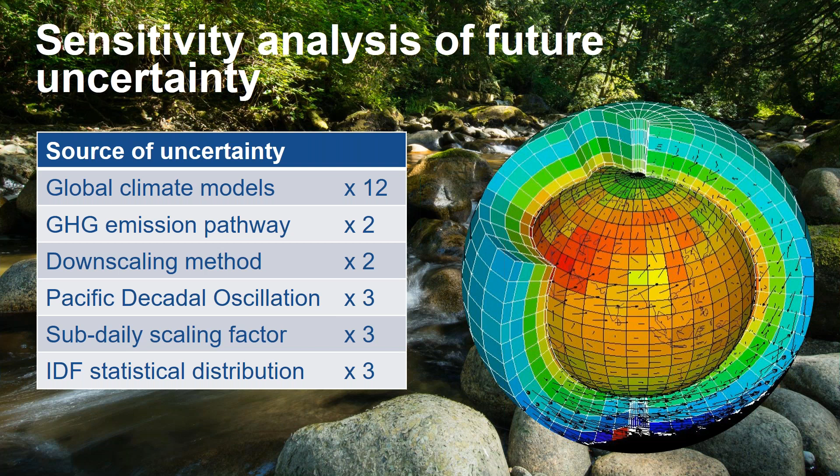The methodology considered all various sources of uncertainty in future climate change projections to develop a moderate and a high future scenario. The net result was over 100,000 possible combinations of uncertainty scenarios: different global climate models, emission pathways, downscaling methods, sub-daily scaling factors. All of those netted out to over 100,000 possible combinations.

Out of all of those, we selected two sets of results: a moderate scenario that represents a middle of the road or a likely scenario for rainfall, and a high scenario that can be considered a more conservative or worst case.

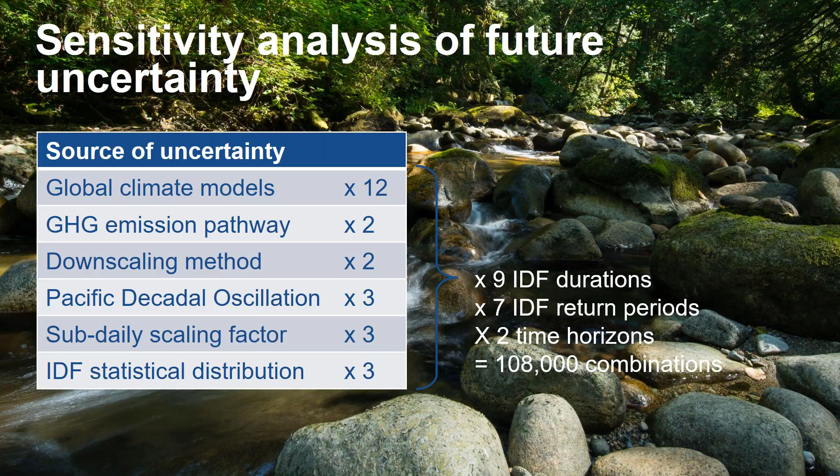An early deliverable was the new rainfall zones for our region. If any one of you is familiar with our area, it's generally known that rainfall increases from southwest to northeast. We used to consider rainfall zones using annual rainfall as the common denominator, which saw a fairly smooth southwest to northeast pattern of increasing annual rainfall.

Our new zones, which we call homogeneous rainfall zones, zones of like rainfall: volumes aren't necessarily the same in each zone, but the patterns are. And as you can see, the new zones are a bit more, shall we say, blob-like than smooth contours. So, for example, Zone 1 covers the west half of Metro Vancouver, and Zone 4 is most of Burnaby, and there aren't any smooth lines of delineation like there were with the annual rainfall zones.

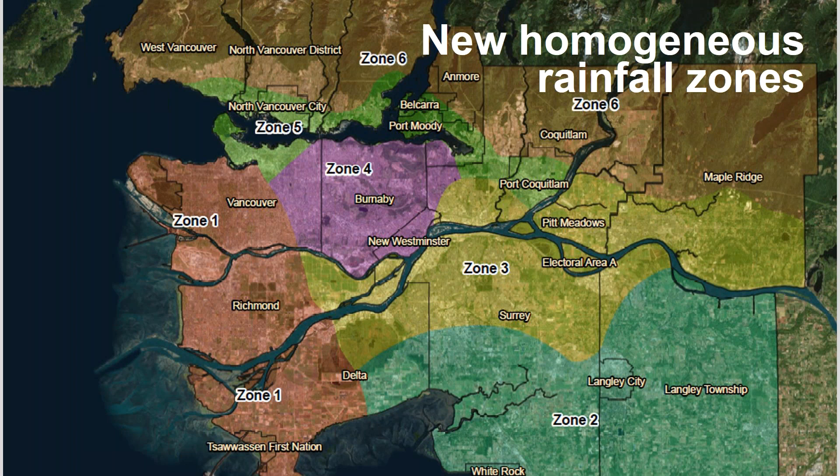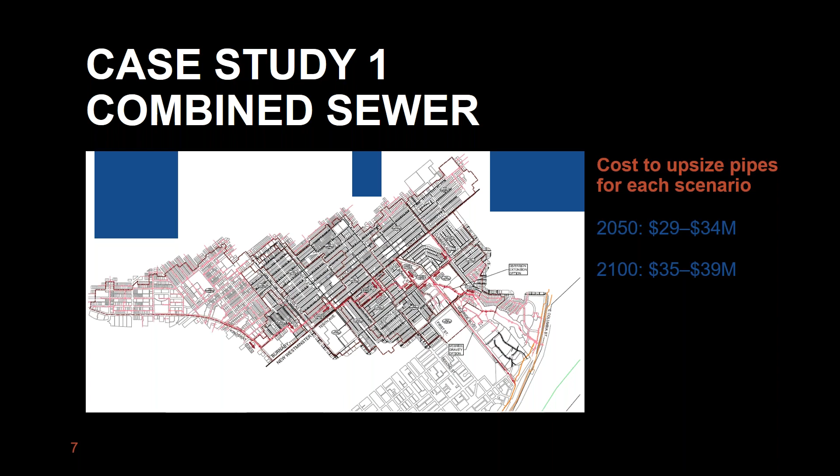The flooding could be mitigated by upsizing pipes, and the costs right now show the range of the moderate and high scenarios. The incremental costs of choosing the more conservative scenario are around 10 to 15% higher than preparing for the moderate scenario. So the spread and uncertainty isn't as great as some feared.

Case study 2. The second case study looked at the Port Moody Coquitlam drainage area, also known as the Chine. This is an escarpment with storm sewers and creeks. Similar to the first study, the climate change results in flooding, and pipes can be upsized to address capacity issues. Again, the difference in cost between the moderate and high scenarios is 10 to 20%. The bigger question here for us is, how do we plan for and fund climate change adaptation, not whether we can predict the exact scenario.

We know that flooding can be reduced by adding source controls or green infrastructure like bioswales, pervious pavement, rain gardens, or detention ponds. And we assumed that these green infrastructure measures would be implemented as each property redevelops. Green infrastructure does help reduce the impact of climate change on peak flow, and we should pursue it as much as we can, but it may not be enough to counteract the increase in precipitation due to climate change, or all of the increase. We can't expect to keep the same level of service by relying solely on green infrastructure in the face of climate change, or solely on gray. There's

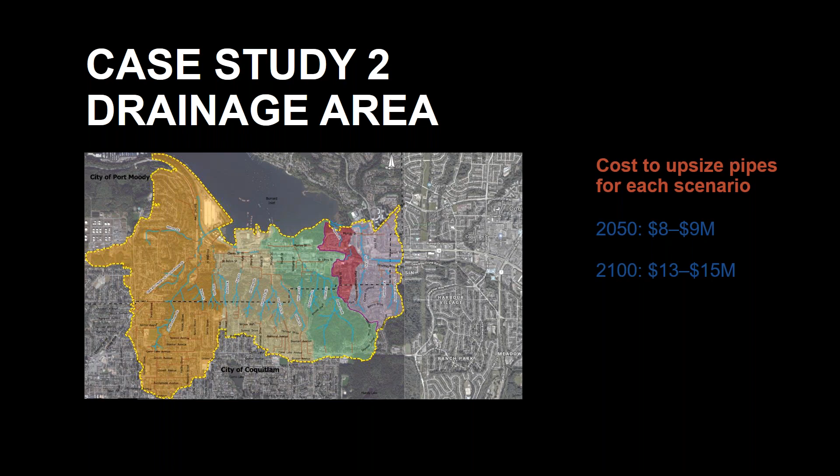sharing of the load. The third case study on our sanitary system, sanitary sewer I&I, was the Collingwood Sanitary Trunk Sewer in Burnaby, which runs west from Metrotown into Vancouver. The focus was the change in inflow and infiltration, which, if you're not a sewer engineer, is basically leaky sewers, with future rainfall increases. Inflow and infiltration enters the sanitary sewer through rainwater and groundwater, which it shouldn't.

In addition to climate change, population growth will impact the sanitary sewer capacity. The population in the sewer catchment is projected to more than double by 2100. Population growth alone will challenge the sewer capacity, even with today's rainfall. If the pipes were upsized just for population growth, but not climate change, capacity would be mostly fine into the 2050s.

Sanitary systems are designed with some excess capacity for I&I, which in this case can accommodate the precipitation in the 2050s, but by 2100, climate change-induced increases in I&I will challenge the pipe capacity, and more pipe upsizing will be needed at a cost of $1 to $2 million to account for future climate.

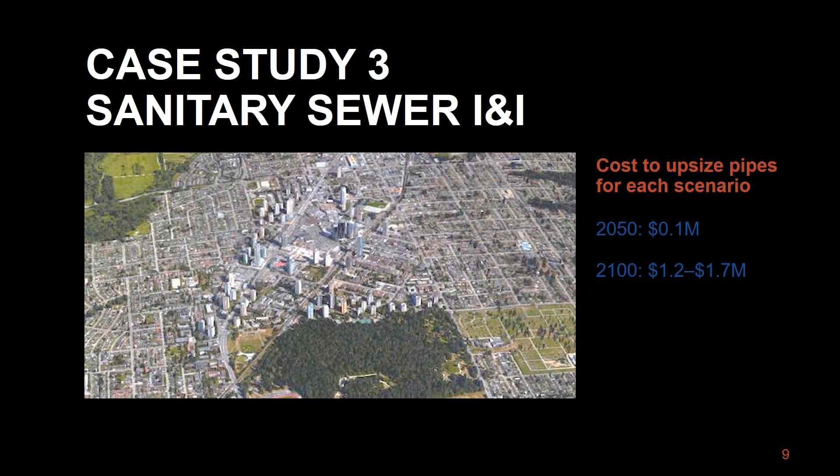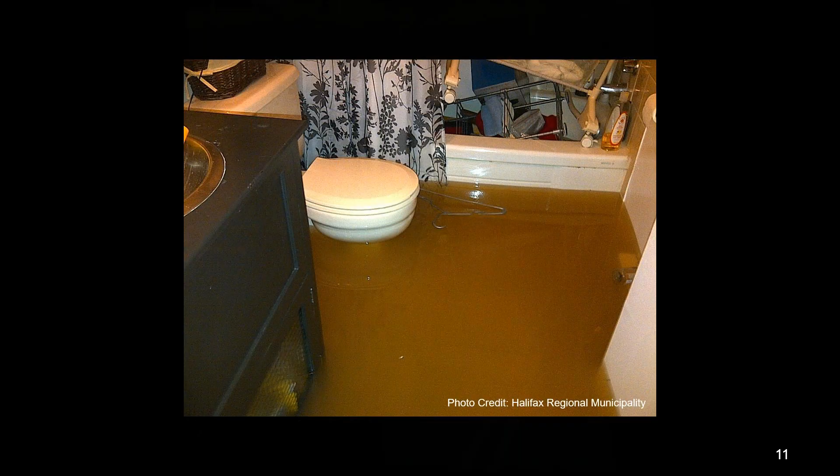So those are our case studies, and just more generally, our projections on climate may result in more street flooding, basement backups potentially, and the thing is that we are continuing to develop our region with more paving, more roads, more vehicles, and more population. And so, to me, what we're in is an environment of decision-making under deep uncertainty.

And this field of study, whose acronym is DMDU, is what we're doing. We're making decisions under a lot of uncertainty. And a challenge for the infrastructure business is the long lifespan and high costs of the things that we do to redo, fix, or upgrade.

Sewer infrastructure, for example, can last for over 100 years, and it can cost time and money to redo or dig up again. And engineers have provided the expectation that civil underground infrastructure went in once 100 years ago and then gets replaced 100 years later. This, of course, assumes that loads wouldn't really change over 100 years, which, of course, we know is not the case. So now that we know what future rainfall could be, we have an idea of what challenges to the system could happen. And we know there may be more flooding, more soggy ground.

So I ask, how do we make decisions that will reduce the risk later, sometimes a lot later, and what do we do now? So we can tell you how hard it might rain in the future using these projections, and we could even tell you how big the pipes need to be or how big the rain garden needs to be. But what is the right solution? How robust is that solution? And what happens if we're wrong, and how do the costs get played into this equation?

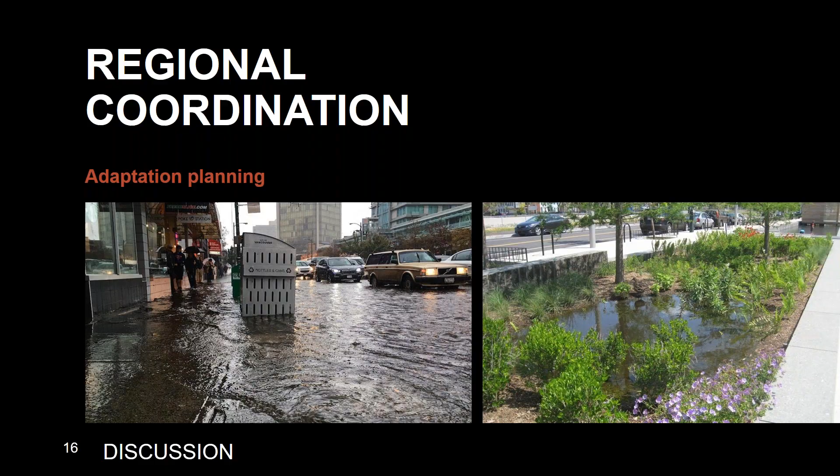So I'll end here with my daughter, who is currently 2.5, and who, as you heard in the intro, I chase around the park all the time. And the thing is that she will be 83 in 2100. So she'll be alive, she'll be thriving, my family will be around. So I asked, what decisions will we have made that will make her future great, and how can we collaborate and make decisions that will make this world thriving, livable, and safe?

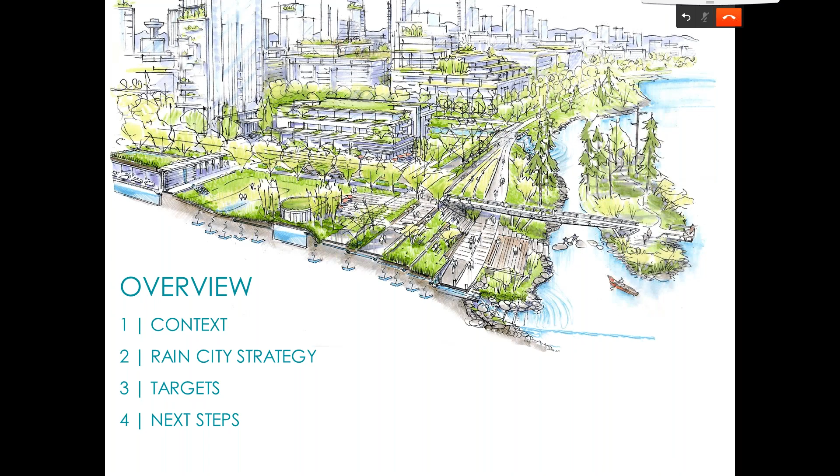So I'm going to talk a little bit about the work that Vancouver's been pursuing through something called the Rain City Strategy, which is our effort to really reimagine the future of how we manage rainwater in the city in a more holistic and integrated way. So I'll just provide a little bit of context, and the Rain City Strategy actually was recently unanimously approved by our council on November the 5th, so we're really excited about that. So I'll provide an overview of what the directions are in the Rain City Strategy. I'll speak a little bit to some of our targets and our next steps.

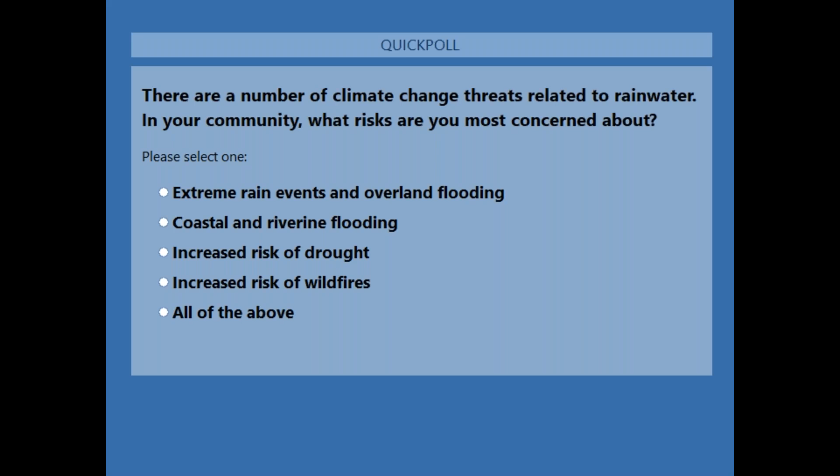All right, so the results were 19% extreme rain events and overland flooding, 7% coastal and riverine flooding, 7% increased risk of drought, 7% increased risk of wildfires, and 61% all of the above.

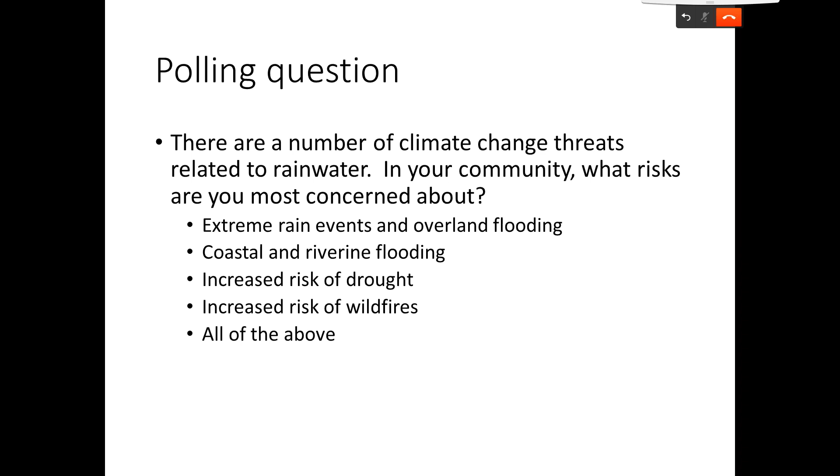Okay, that's great. One thing I would just highlight is oftentimes as we've been doing this work around rainwater management, it's been really important to understand that thinking about rainwater is as much about when there's a lot of water as when there's not enough water, and that's something that people often forget, that things like drought and wildfires, etc., are actually becoming increasingly important issues for both urban and rural areas.

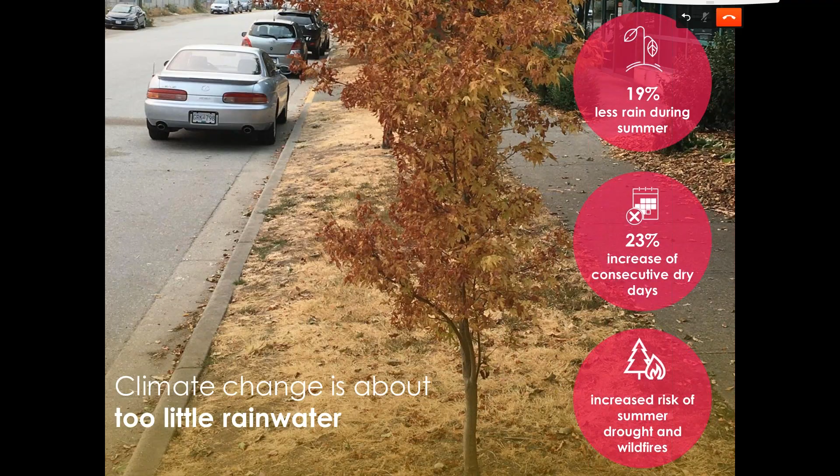For Vancouver, we're thinking not just about how to adapt to too much and too little water, but we do have some very significant environmental and water quality issues related to our receiving waters that are linked to our sewer and drainage system. And so for Vancouver, there's really two issues. The first is combined sewer overflows. So many cities across North America and actually globally that were developed around the turn of the century or sooner, they were developed with combined sewers.

We've been working for many decades through our sewer separation program to try to address this issue. And we recognize now that we need to really diversify our toolkit and think about more short-term actions that we can generate to help address this issue, because it's just becoming increasingly challenging with climate change, with increased expectations around protection of water quality, and the interest, for example, of our Tsleil-Waututh First Nation that is leading the Burrard Inlet Action Plan. They have aspirations for having food fisheries in Burrard Inlet, and so looking at pollutant load in these receiving waters and impacts on the ecosystem is a really important part of achieving that ambition.

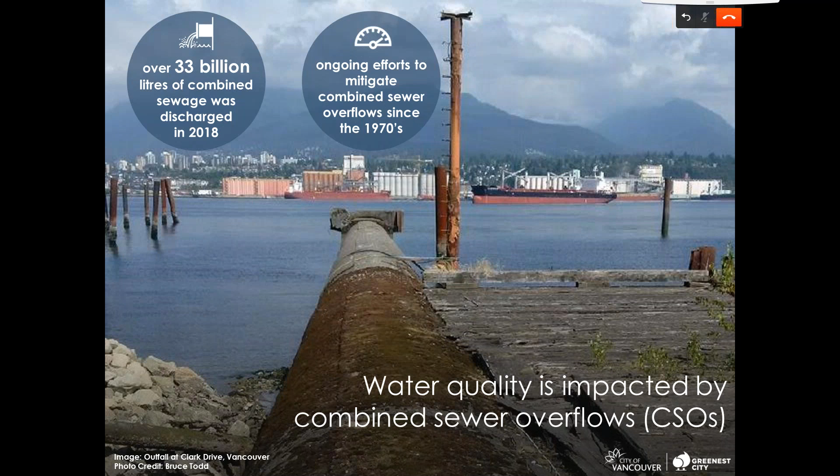The second part of our water quality issue, again, which will be exacerbated by climate change, is around pollutants that are picked up in stormwater. And in this group, there may be people who are very expert, so I may be telling you things that you already know, but I just want to highlight that oftentimes people don't recognize just how toxic urban rainwater runoff is. And so just to give an example, the kinds of pollutants coming off of rooftops and roadways in particular can be everything from litter to heavy metals, and in particular, actually tire debris.

So there's been some really outstanding research happening at the Washington Stormwater Center in Washington State, where they've been looking very specifically at the connection between tire wear and impacts on salmon health. And they started to see patterns where after rainfall events, a lot of the salmon were being affected and having all kinds of health problems, in fact, having pre-spawn mortality, which is very problematic for the health of the species, and they found a direct connection to tire wear.

So a lot of people may not realize that when they brake their vehicle, the action of braking is generating small metal particulates, copper in particular. The tires are impregnated with zinc, among many other chemicals, that are wearing down and becoming small debris that's getting picked up in the rainwater. And if it goes into our drainage system unmanaged, all of those pollutants are basically going into our receiving water and are known to have significant impacts on aquatic ecosystem health and fish and salmon in particular. So these are all significant concerns that we need to try to address in our urban environment.

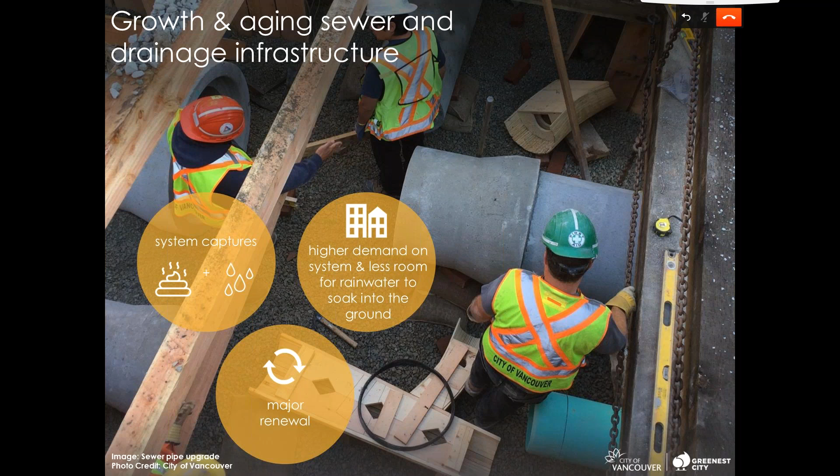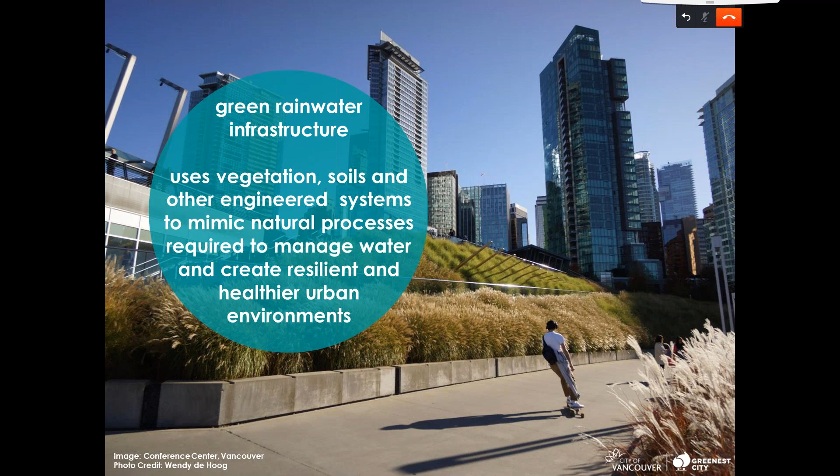So green rainwater infrastructure, what is it? Green infrastructure is a very, very broad and versatile toolkit. What it has in common, the many different approaches, is that it uses a combination of engineered systems as well as vegetation and soil ecosystems to actually help manage both the pollutant load and the volume of water that is being managed. So we're trying to mimic the natural pathways for water that would have existed pre-development.

So basically allowing water to be absorbed back into the ground, to be absorbed and evaporated into the atmosphere, or evapotranspirated through plants and trees back into the atmosphere, or be harvested and reused. So as I mentioned, it is a very, very diverse toolkit. So we found through our work that sometimes people think only of rain gardens, but it actually takes many, many different forms and can be implemented at many different scales and can have a very high level of performance depending on how much water you want to manage.

It can be anything from absorbent landscapes and just the depth of soil that can actually hold water and allow it to both be returned to the ground or evaporate into the atmosphere. It can be rainwater harvesting that basically captures and reuses the water rather than sending it or discharging it into our pipe and drainage system.

We've got tree trenches as well as permeable pavements, and then more district scale systems that can take the form of bioswales, wetlands, or building specific solutions such as blue-green roofs that are a step beyond a standard green roof that actually designs in some storage for rainwater and allows for the continuous evaporation of water through the plant ecosystem.

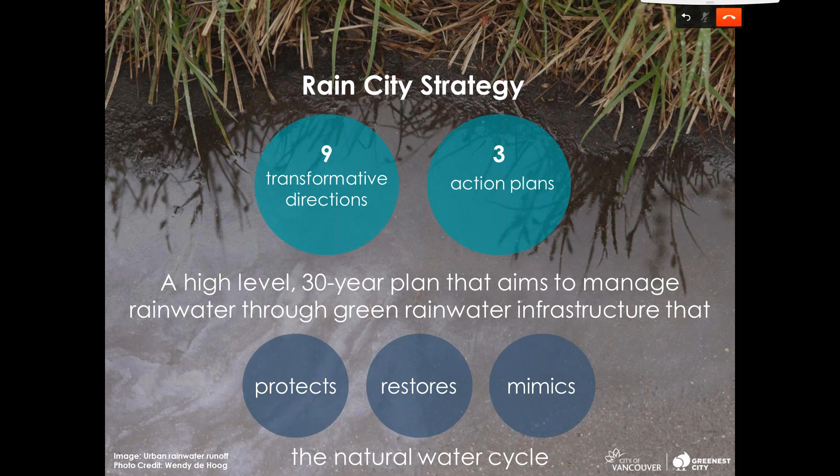So ultimately, we've got 6 adopted objectives with the Rain City strategy, but I'll just touch on the 2 that are most prominent and really underpin the entire initiative, and that is we are looking for as many ways as possible to reduce the volume of rainwater entering the pipe system. So we're trying to create new pathways for water, whether it's back into the ground, to be absorbed by plants and trees, or returned to the atmosphere, which is a very effective strategy and very beneficial to the community for a variety of goals around urban heat mitigation, etc.

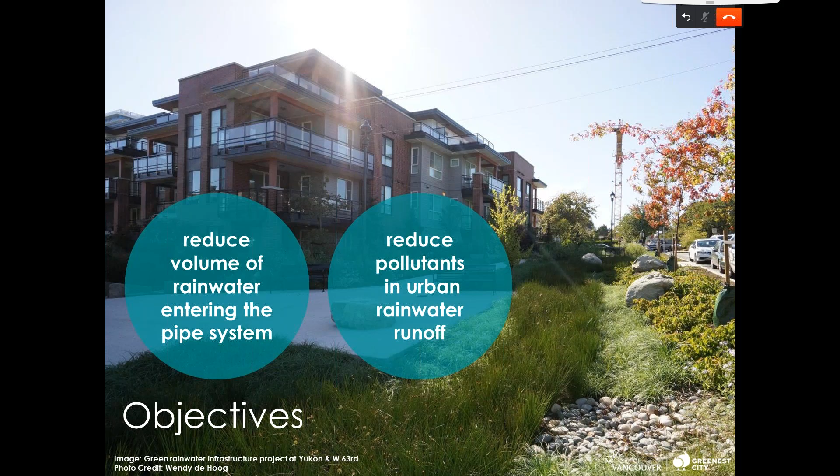But also we want to try to reduce pollutants in the urban rainwater runoff and reduce the occurrence of combined sewer overflow. So by diverting water from the pipe system, we're helping alleviate that pressure, and we're preserving capacity in the system for climate change, for growth, and also to help address our combined sewer overflow.

So Andrew referenced a lot of sort of technical details about return periods and design parameters, et cetera, and these are really, really important, and it's been a big part, I think, of the culture in the engineering and utilities group for a long time to be practicing this. And I think what we've come to realize through the Rain City strategy is that the rainwater management responsibilities and the roles that different people have to play extend far beyond our traditional engineering utility groups.

So obviously they continue to play a really critical fundamental role, but we've really recognized that actually to execute successfully on more integrated approaches to rainwater management, including green infrastructure, we actually need people coming to the table from across the organization. So for Vancouver, we've actually had 5 major departments and over 40 branches across the organization who've been actively involved in helping to shape up this initiative and who all have a role to play somehow through their work to help us execute on the vision.

And so this is a big part of our work. It's actually been bringing people together and exploring for the people who maybe never thought that rainwater management was actually even one of their responsibilities or a role that they had to play.

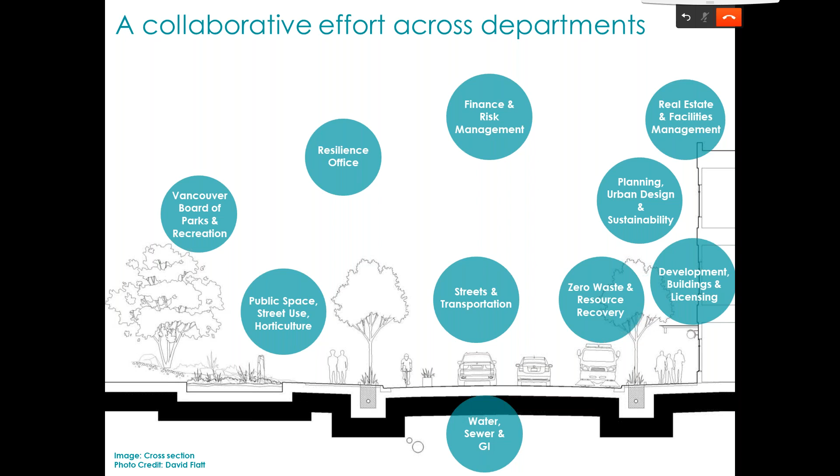That they've come to see how critical it is to have all these different people in alignment to help achieve the goals. I've just got the little picture of the street sweeper in there, and it's just one example that our sanitation teams and operations and our waste management team have been doing street sweeping for many years, oftentimes for cleanliness and keeping the city looking attractive and managing sediment loads and leaves, et cetera. But they never really applied it in a way that was going to deal with contaminants generated by vehicles on roadways or sediment that might be contributing to clogging in our pipe system or pollutants going into our receiving water. So it really is a chance for them now to work together with us to think about how do we better manage those contaminants at source rather than having them go into our waterways.

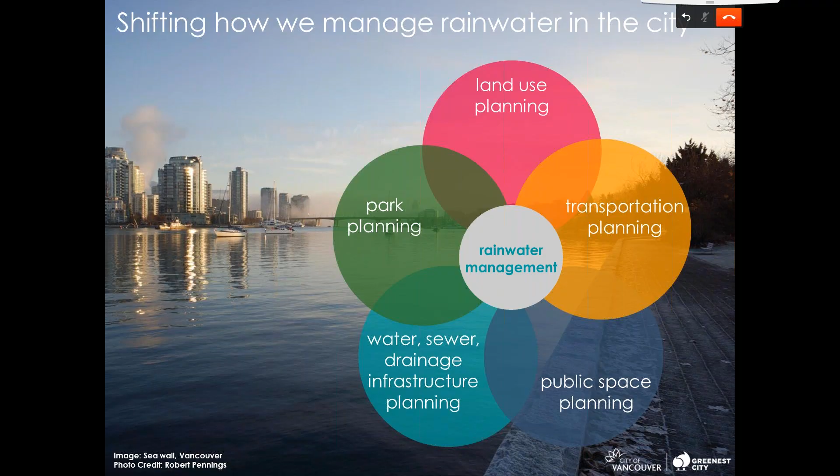So I think our foundational recommendation to council, which they adopted, was that we really need a shift that rainwater management and thinking in a more holistic way about water services and green infrastructure and utility services in general needs to be managed at the outset in a variety of major planning initiatives. So whether it's our community planning and land use initiatives, park planning, our transportation corridors, public space planning, or all of our water, sewer, and drainage infrastructure that will continue to be very critical, we actually need to be thinking about how we address rainwater volume and water quality and how we strive for co-benefits through all those initiatives depending on localized conditions and needs.

I won't touch on all of the transformative directions in detail, but they're available in the Rain City strategy if you're interested. I just would like to highlight a few key things. This concept of striving to become a water-sensitive city is a really big one, where in the past it's been very focused on public health and protection of property and large centralized systems, and we want to have a much broader set of objectives now: thinking about intergenerational equity, how it supports equity and reconciliation with our Indigenous peoples in the community, health and vitality and livability, and how investments in water infrastructure can yield benefits for multiple objectives. And so transitioning towards more resilient, adaptable, and decentralized strategies is a big part of the work.

And for Vancouver anyway, it's a very big transition where we've in the past been focused predominantly on drainage that quickly whisks water away from our public spaces down into our receiving waters. That is very problematic in a climate future where we've got sea level rise, increased pressure on our systems, and coastal flood protection measures that we know will be part of our future solutions. We no longer want to send all that water at high speed down to these low-lying flood-prone areas. So instead of just sending water away, how do we do more to keep water and manage water close to where it lands?

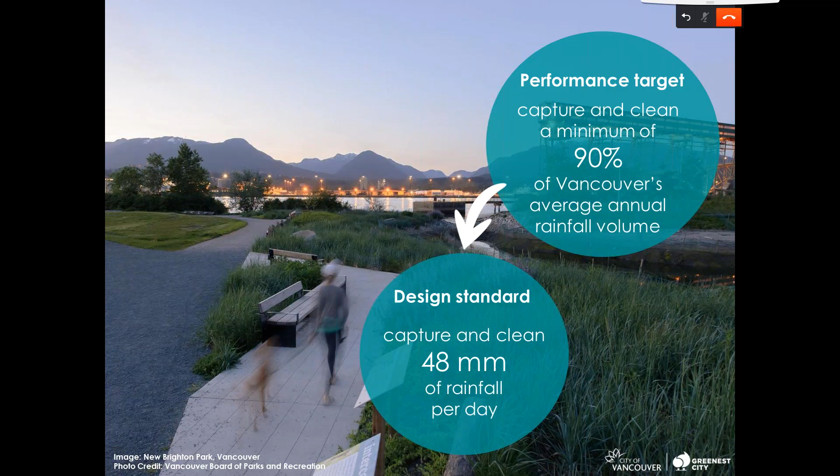There's quite a bit of work to do with the development community on what are some scenarios, how could you achieve that. It's relatively easy to do on low density single family type developments where they have the ability to infiltrate. It does become more challenging where there's underground parkades and zero lot line type developments, and so they need a different suite of tools, and there's going to be quite a bit of work for us in the coming 3 years to develop the plan and proposals and guidance and materials with our industries and academia and other sectors to help support successful implementation.

So as I mentioned, our goal is to really transition from having green rainwater infrastructure as a one-off type initiative. We've been doing it actually for about 20 years, so we've got some really great precedents and great examples of how we've applied it, even in the Olympic Village, for example. There's green infrastructure throughout, from 50% green roofs to an engineered wetland in Hinge Park to bioswales handling 1/3 of the stormwater from the street network. So we've got some really terrific examples.

What was challenging is that we failed to make the leap from really great pilots, demonstrations, or improvements on pilots that didn't work so well into a new mainstream practice, and that's what we're striving to do now. So our intention is that green rainwater infrastructure is now a standard part of our water infrastructure services delivery, and we are looking at how we integrate it in all of our renewal and redevelopment projects, as well as how we use it for strategic retrofits.

We are thinking well beyond just small localized rain gardens that serve a relatively small volume. We are looking at more significant district scale and very intensive forms of green infrastructure that can actually manage much greater, much more intense and large volume rain events. So we're really transitioning how that is integrated into business as usual within the organization.

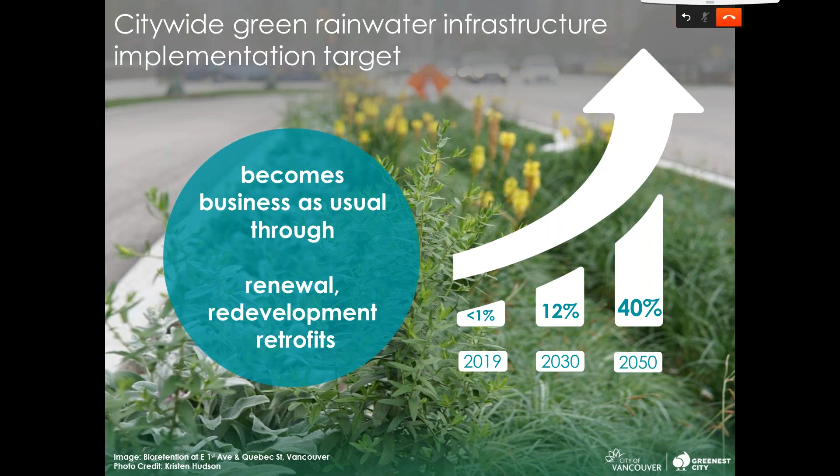Today, just less than 1% of our impervious areas are actually managed by green rainwater infrastructure, so we have a really, really long way to go, but we're ambitious and we're excited about it, and we believe there's great potential for it to be a really cost-effective part of a future gray-green integrated system approach. And so we're striving that by 2050, 40% of all impervious areas in the city, on public and private property, are using green rainwater infrastructure. And in terms of what that will yield, we expect about 30 billion liters of water treated and diverted from the pipe system every year.

Our combined sewer overflow volumes are quite substantial in the Vancouver area, and so it's not something that we believe will be addressed by green infrastructure alone, but we do believe it has a really important role to play, and it's an investment that yields co-benefits for a whole broad range of objectives. And so based on our projections, right now we're estimating that about 1/3 of the current CSO volume would be addressed through green infrastructure, and we need to look at a whole range of grey infrastructure tools that'll be a broad combination of initiatives to help address the whole issue.

Okay, so in terms of the polling question, I had one before about CSO cities, and I know in Metro Vancouver there's only 3 cities that have combined sewers, and so it's not an issue that's always as relevant to everyone, but I was just curious of the audience that's part of the group here, how many other cities are dealing with combined sewer overflow challenges, and so I wondered if we could put that polling question up. Okay, for sure. I've got that one up right now. All right, so the results for that were 39% yes, 18% no, and 42% do not know.

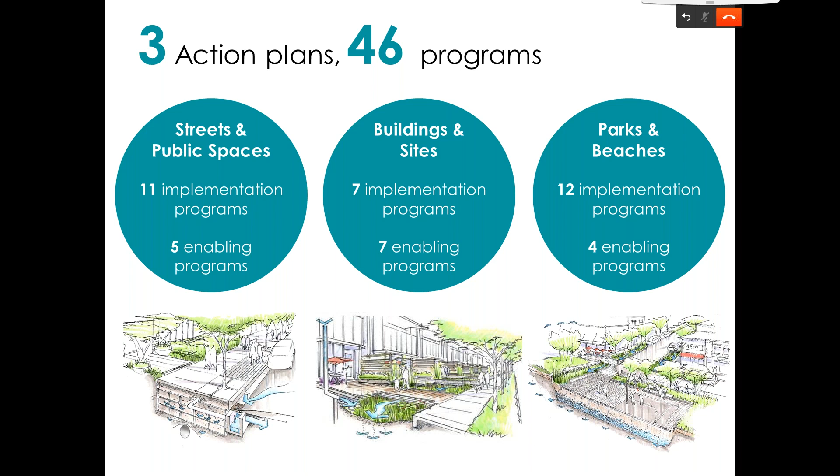Well, just to say that we've been doing this for a long time. We've got a lot of examples, but there's a lot of work to go on learning how to execute successfully. And like I said, it's been a team effort to look at the practical ways of trying to implement. So we're really keen to learn from other cities and to collaborate and share resources, share learnings, and best findings. So if there's people on the call that are part of groups or organizations that are trying to do something similar, we're really happy to share and collaborate and also learn from you as well, so that we can all be more successful in implementing programs.

And here's just a few examples, from a major permeable pavement program to resilient roofs, which is going to look at blue-green roof application, to district scale and building scale rainwater harvesting programs, and blue-green systems, which is a really intensified version of rainwater infrastructure that's looking at managing water from a broad area on selected corridors and in selected public spaces. So that's all.

Thank you. Great. Thank you so much, Melina. Great presentation from both you and Andrew. And I do have a number of questions that have come up. So I'll just alternate between yourself, Melina, and Andrew for the questions. So first one's for Andrew. Using the projections that you have, how much of it guides your planning in real time? How do you adjust your finance contingencies to accommodate this planning?

That's a good question. The thing about the way Metro Vancouver is structured is we don't directly design a lot of drainage infrastructure currently. So, I mean, we have a lot of drainage infrastructure. So I would say really right now that's a policy under development in terms of the effect of the projected IDF curves on how they affect our capital planning and our costs. So, long story short, we're trying to figure that out.